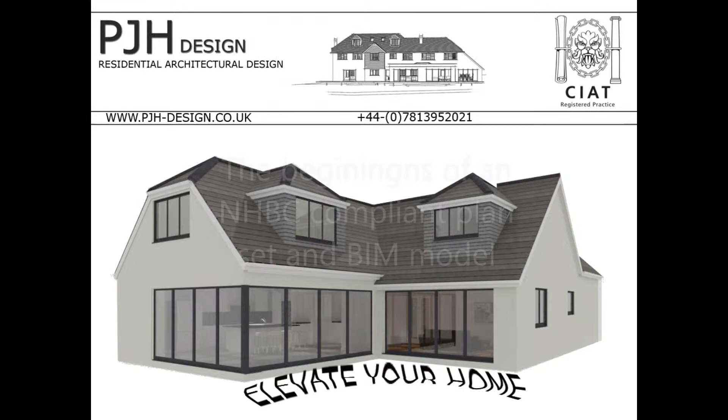Just one more quick video of the mere embryo, the start of a complete plan set for a brand new house. This is a work in progress, currently with a structural engineer, but thought it may be of some interest. This is an A1 plan set, page 1, foundation plans.

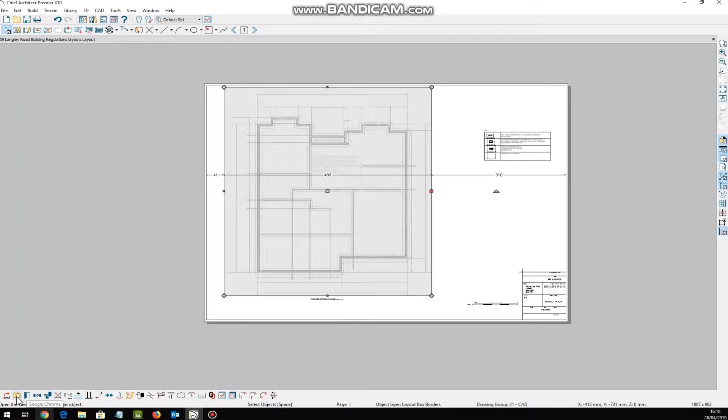Can't remember what I built in 3D here, but we'll have a quick look. Not a lot to see there. There's your foundations anyway. Lovely, lovely stuff.

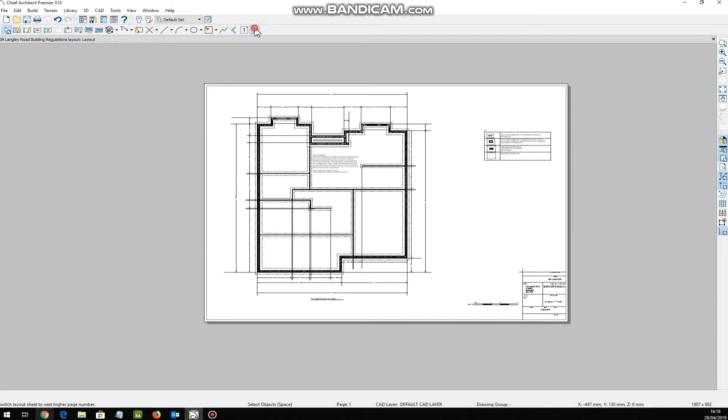Page 2, bison floor, section details for venting etc. and layout. We'll open that, and I'm actually going to open that on the foundation floor, I think, to give you a good view of the structure.

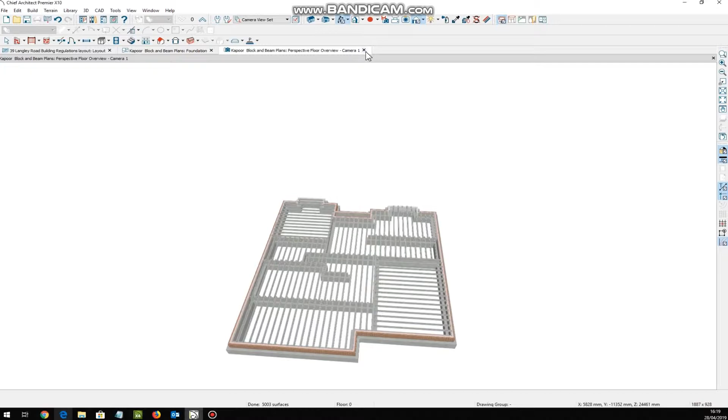There's your bison floor. I think there's actually one block in there, but that's basically the gist of it, and then we'll have insulation and screed floor over, but that's your basic floor layout. Page 3

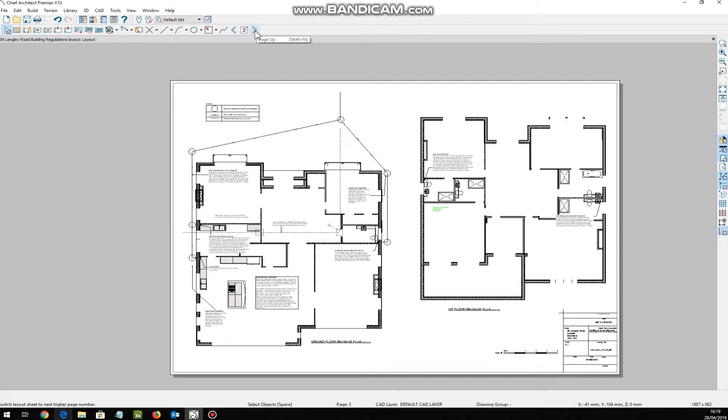is our drainage layout and soil vent pipe layouts to first floor, and we should have those for second floor as well. I don't know why, but English say ground, first and second, where Americans are far more logical and say first, second and third, but anyway, I digress.

This is a drawing specifically designed for the engineer. It's not actually relevant to this plan set, it's just to tell him what I want, but the next drawing is largely the same. So I'm going to open this in 3D.

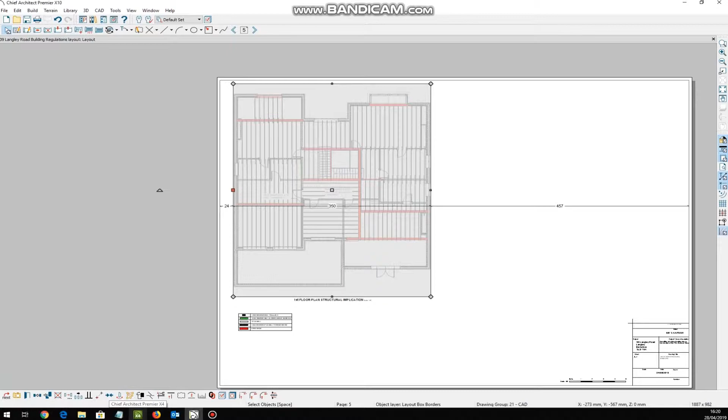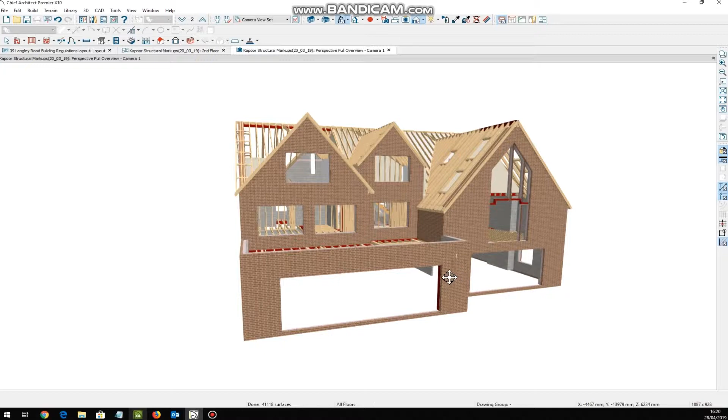This is really how I like to convey information to engineers. This is really what I want, and I can send this courtesy of Chief Architect as a 3D model. I can load it up to their cloud, and they've got a special viewer for other professionals and clients alike to use. I'll try and keep the clients away from it, to be honest, because they can be a menace. Not being rude, but it's true.

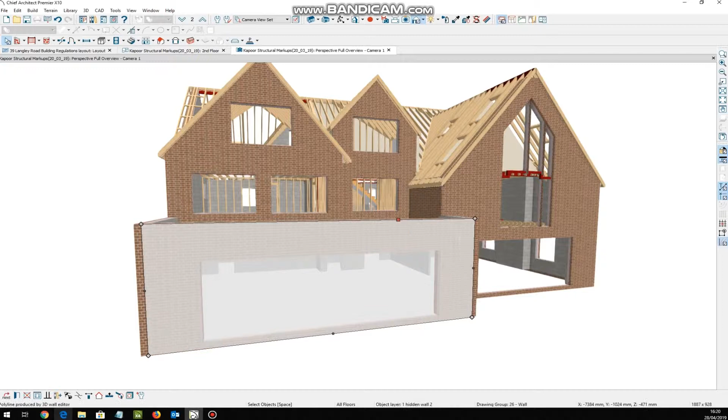Well let's just open that object, because I believe that's a hidden wall. Layer 1, hidden wall 2. Let's hide that, and you can see what's going on there.

So we've actually got a goalpost frame in there. Fairly big loading on there, which will be on some pad foundations. I've got a feeling this is a hidden wall as well. Let's open it and see what happens.

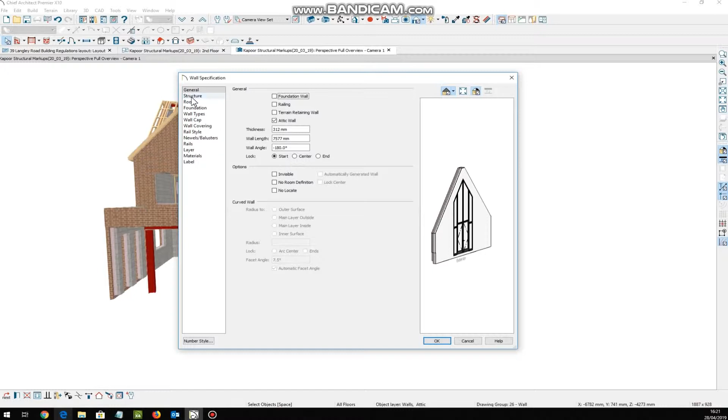Well, it's an attic wall, but if I get rid of that, you'll be able to see we've got a steel frame for the cathedral windows there. As you can see, all the steels, all the beams are marked up, everything. This is real key information.

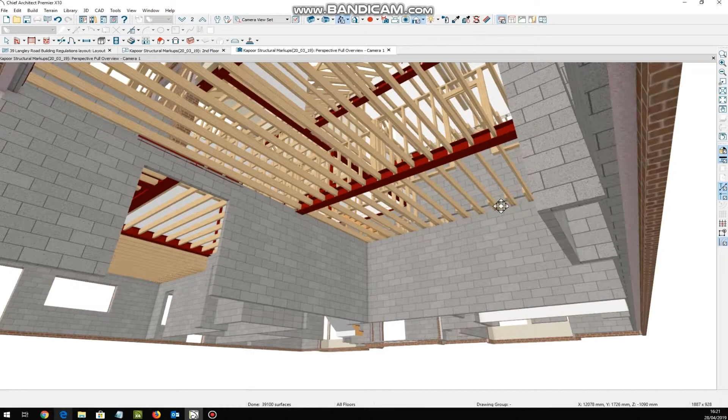It took a long time to design this property, and you can see we've got good wall alignment in certain strategic places, so our steel spans aren't overspanned, and yet we've still got some really big rooms. I think this is our biggest span here.

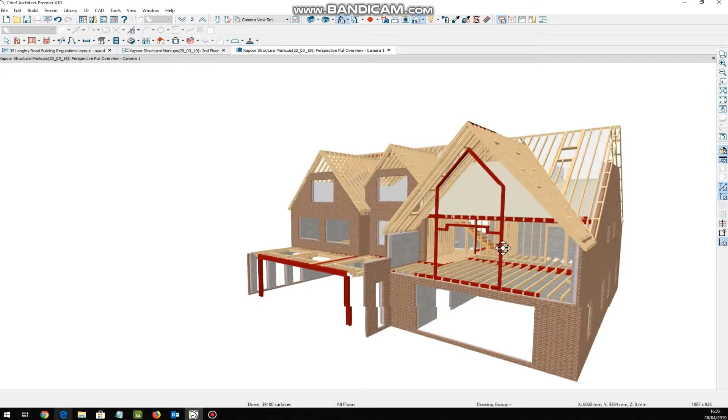Onto the goalpost frame, onto some big pads. So this can all be engineered because it's new work. It'd be a lot harder on an extension, as us UK users say, if we do have any American viewers - an addition.

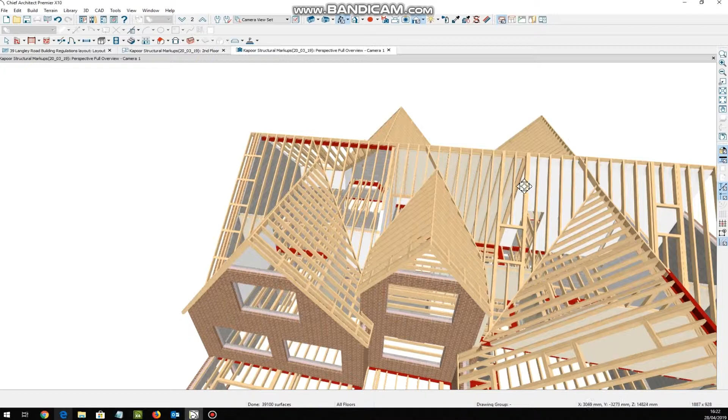The roof is being designed by the engineer, but again I've made sure we've got a load bearing wall that aligns through the entire building here, and I've drawn it up to the ridge just to illustrate that that's exactly what it is, but it will probably be just posts going up to the ridge, and we can facilitate a ridge beam through there if we can.

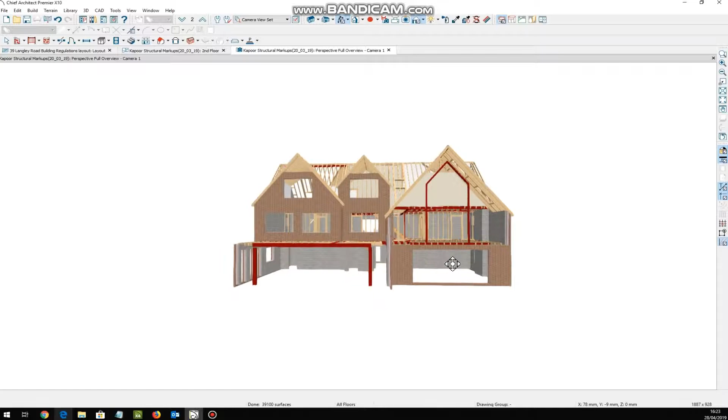Although the roof looks complicated, and it needed to be fairly complicated to pay homage to what was there originally - that was a planning stipulation - it's a large house, but it's not as complicated as it looks, so we get the best of both worlds here. It was a long time on the design table and quite a lot of negotiation with planning, but this particular model has all the decorative layers stripped away, removed.

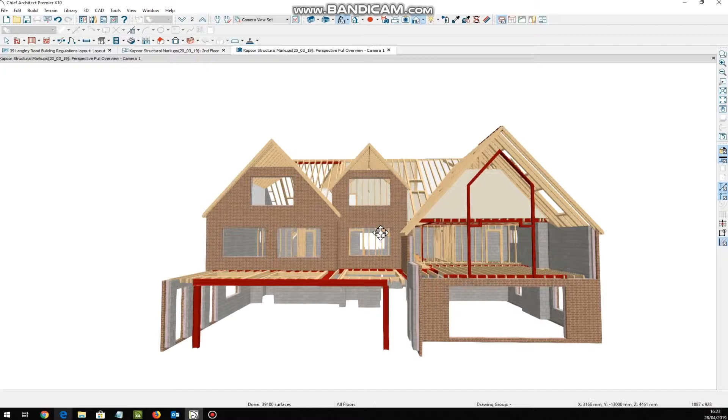There's no windows, no doors, no plaster, no ceiling cover. It's literally - you can twist this around, see the layers, see what we're trying to achieve, see what can be load bearing, see what doesn't need to be load bearing, see what can just be a boring old stud wall, see how the stairs work, see where the stair trimmers go.

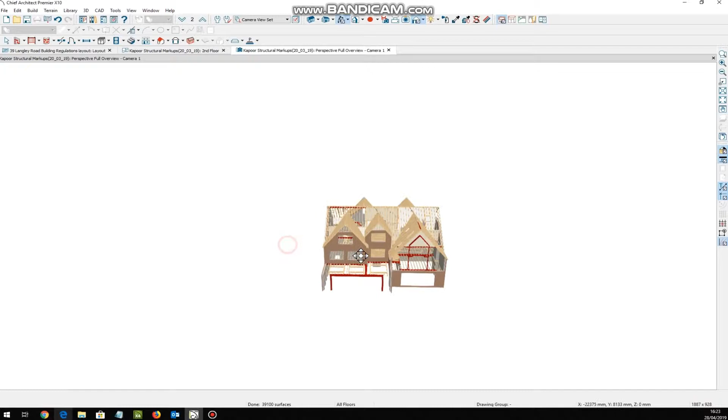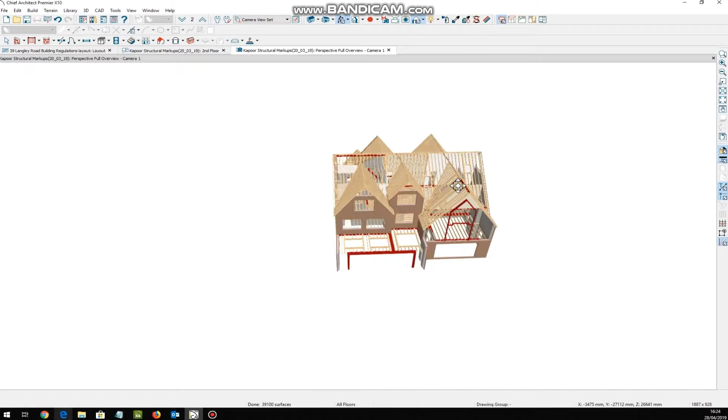This, coupled with the black and white plans, is just a huge time saver, and I'm a huge advocate of BIM. I think it's the way forwards. Certainly in the age of the internet, I can work with people I've never actually met and convey really useful, accurate information.

So I just thought I'd add this to today's video upload as general interest. I'm just going to give it a random spin around very slowly, and then I'll sign off for the day.

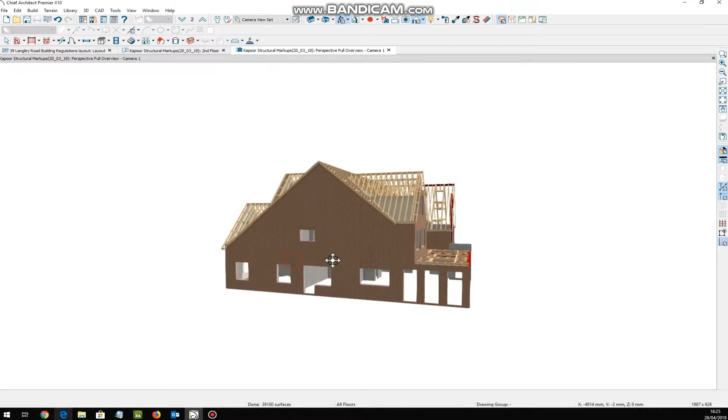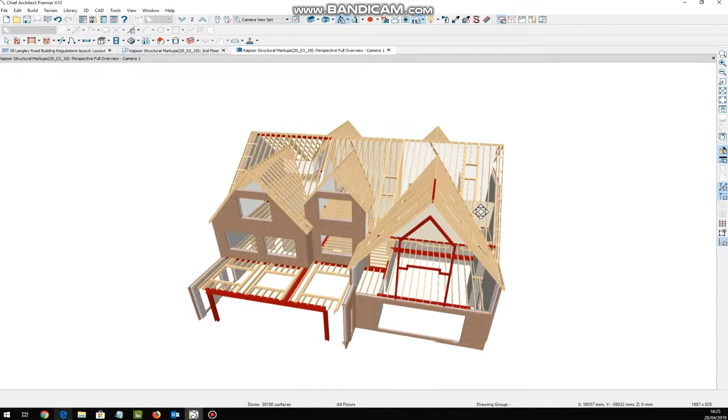I'm quite excited about this, and I can only apologise for the time it takes. I do keep very busy - I'm very lucky to say. With all this Brexit nonsense, I don't know if it'll last or not, but that's another topic for another day.

But yeah, there's a lovely view, and of course we can add foundation layers to this as well, which gives us a great opportunity to cut sections through as well. So if I cut a section through there, I can strip away all this fancy stuff and just show the carcass of the building, and half of my work is done. I just need to alter what needs to be altered, and away we go.

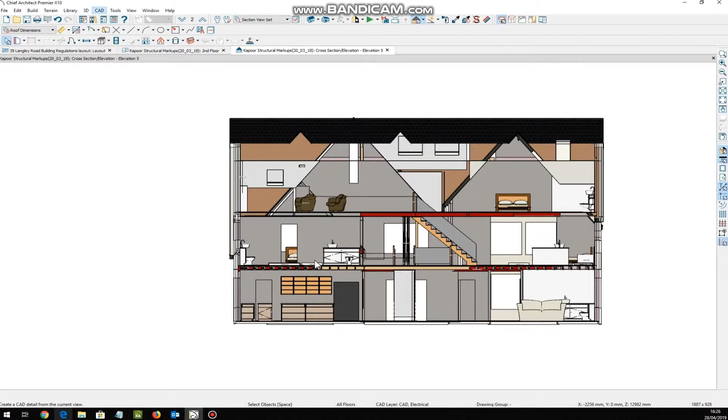Really, I like to convert this into CAD objects, which is where I then work line by line - CAD detail from view. What I generally do is select the whole thing, open it up, if it ever opens. It's very slow because I'm recording as well, but I'm on 8 minutes 20, so I've only got 2 minutes.

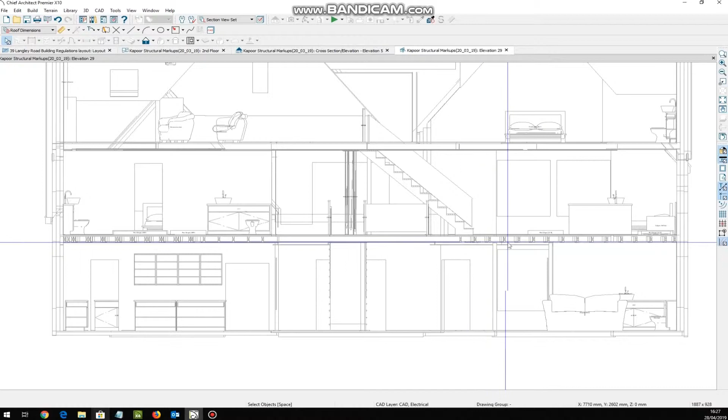But I would change the colour of that to grey, and then I would just draw in the absolute key components. You know what, I actually leave some furniture in very greyed out, because psychologically it gives everybody that general common purpose that we're all aiming for something you can live in. Because two-thirds of the way through the projects it can get everybody down a little bit, and just to see a tiny bit of furniture greyed out against a building carcass can offer a little bit of subliminal encouragement - or that's one of my theories anyway.